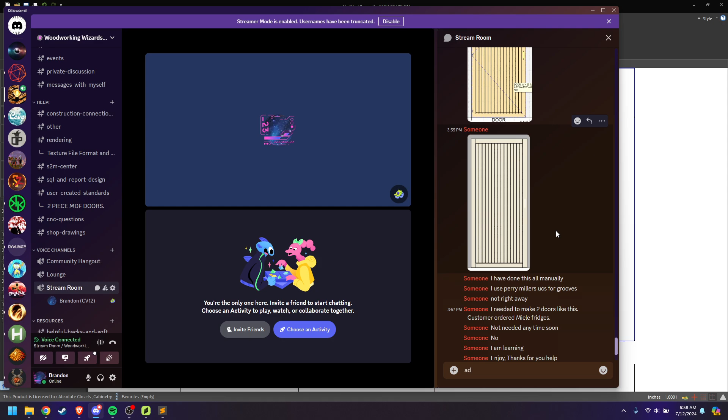This person is using Perry Miller's UCS for grooves, which I don't have any issues with—I think it's great. But in this case, the user had to shape constrain their flat panel that was going into their shaker door, because their 3/8 router bit that does the rabbet on the back side of the door would leave a 3/8 radius in the corners. So they wanted to shape the flat panel insert on the corners to match the inside radius of their tool.

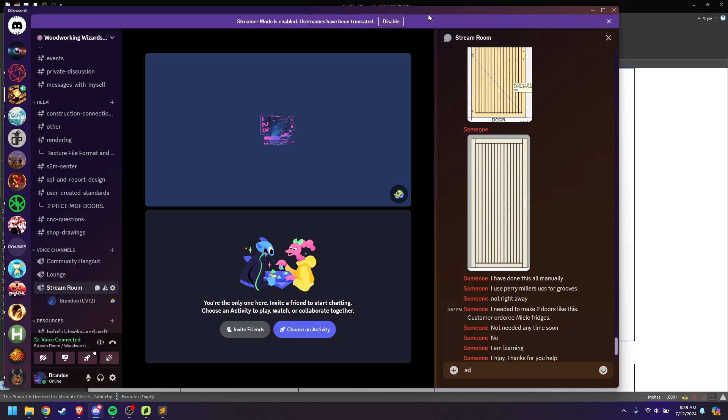So to do that, we had to do some shape constraining and then save it as a library part. Adding routes like this to a part that is being dimmed by a UCS is, well, basically—as much as I can remember, since I haven't done something like that in a while—you have to dim the routes and then owner them to the UCS-added part.

Otherwise it just doesn't work. When you try to dim operations to a part that was dimmed by a UCS, there are just some hoops to jump through. So not only was that kind of a bummer for them because they couldn't just use Perry's UCS, but they also were not familiar with writing loops.

After talking with Tristan a little bit about it yesterday, since he was kind of hanging out in the chat with us while we worked through it, I decided to try to stream for a little bit today and give a very simple introductory lesson on writing a loop.

Loops for me were something that were very, very difficult to learn, as anybody who spends time talking with me has probably heard me say, and might even be tired of hearing me say. I don't really know why it was so hard for me to grasp, but I know that it was. I think it's just a concept that is very abstract, and because of that abstract nature, it's just a challenge.

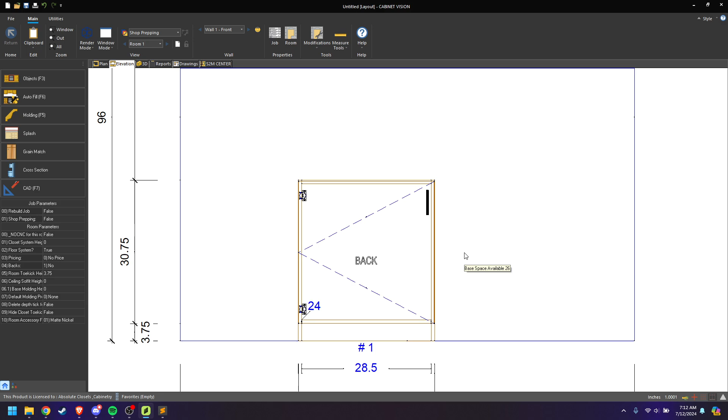It's still early and I'm drinking my coffee. Apologies. All right, so...

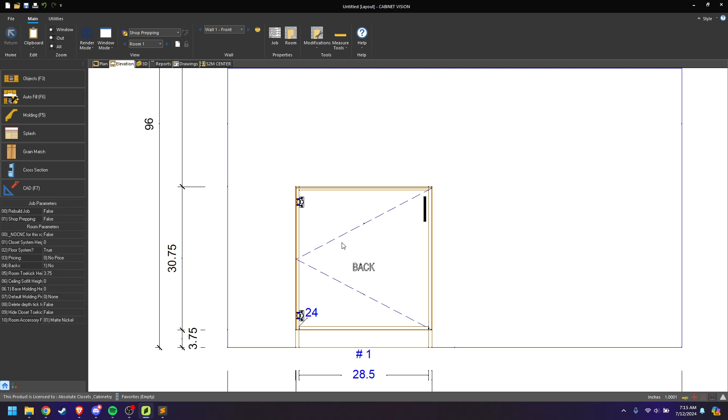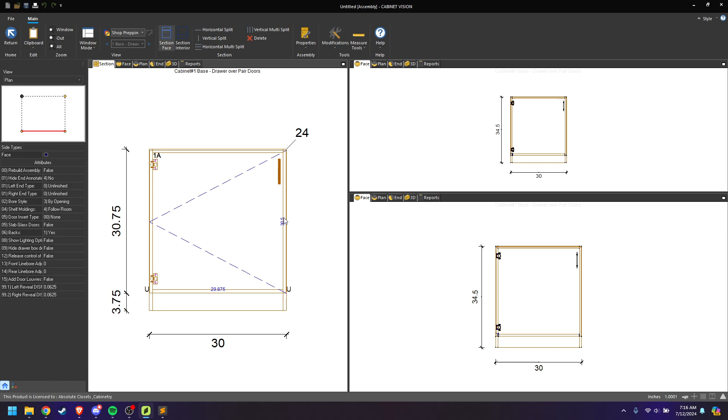You need to add a door that has a flat panel. So I'm actually just going to change this to make it easy, because I don't really want to find a door that doesn't have any UCS working on it. All right, we've got this little 1x1 dado appearing on my door - so we know I've at least typed the right word for it. The lovely thing about the doors I've noticed is you don't really see the dado when you're in the part editor, and I'm not sure... I almost wonder.

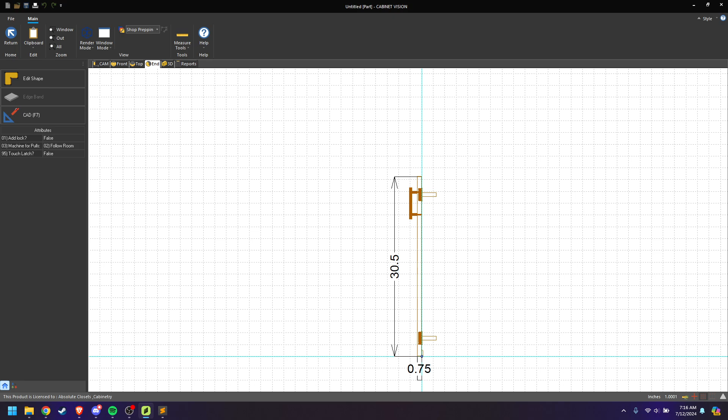So one of the kind of fun things, if you know the answer to this, great. But basically, while looking at the actual part editor, I feel like you don't get to see the routes that you add through UCS, which can be a little bit confusing and frustrating at times. But whatever. You can check it at the S2M Center, and you can measure it right on the assembly.

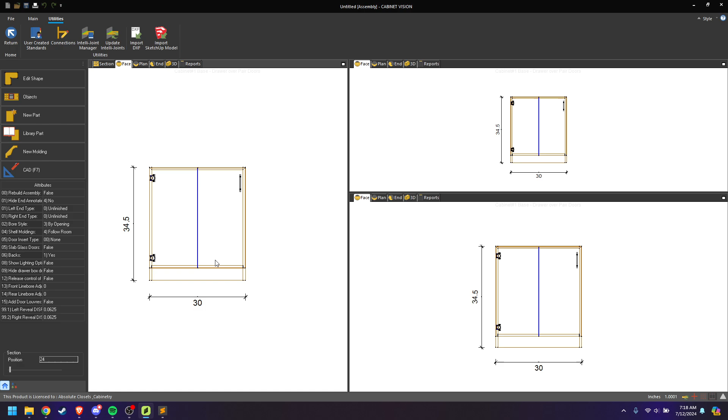So now we've got this sort of... well, let me make it look a little bit more like what we were saying. Just a thin little groove, right? Jeez. All right, so just a thin little groove on the door, right? And what they were wondering about.

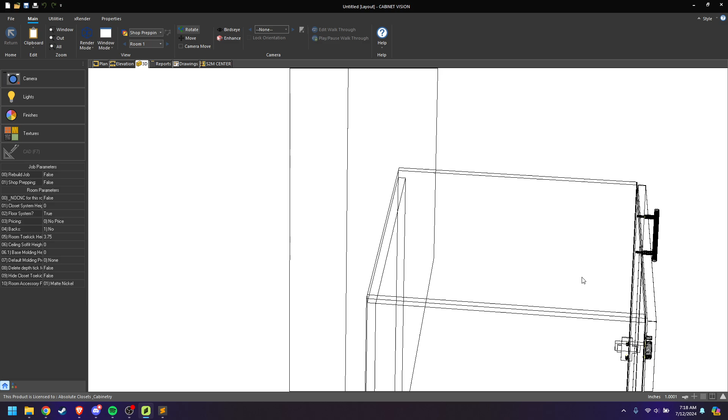Oh, it's on the back of the door, of course. Man, I am just firing on all cylinders today with this. That route is like on the... oh, I didn't add a face working plane, of course. There we go. All right, so there's just a groove in the middle of this door, 3/8 of an inch deep, right?

And so if you wanted to make this groove appear as many times as you need it across this door, that's one of the places that you're going to want to use a loop. Anytime you have an unknown, like an unknown size that you want repeated operations occurring on, obviously not a line bore, because line bore you can just use repeat, but yeah, anyway, I'm rambling. So

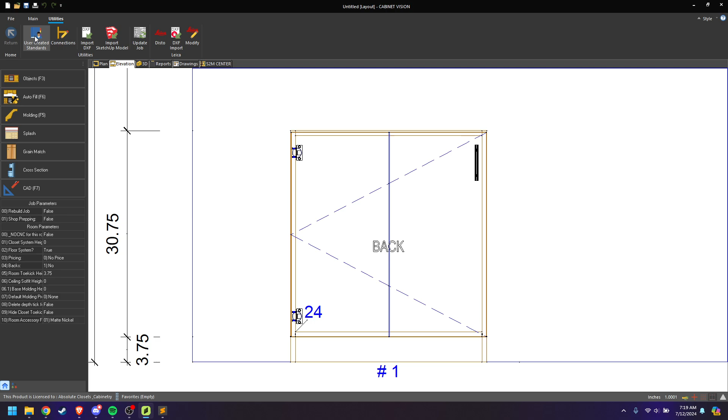just to kind of give an example of a really basic way to do this, if you only had one door that you were going to do this on and you never needed to do this again, so there's no sense in writing a UCS for it necessarily, that would look something kind of like this. So you got your first groove. All right, now got my second groove, my third groove.

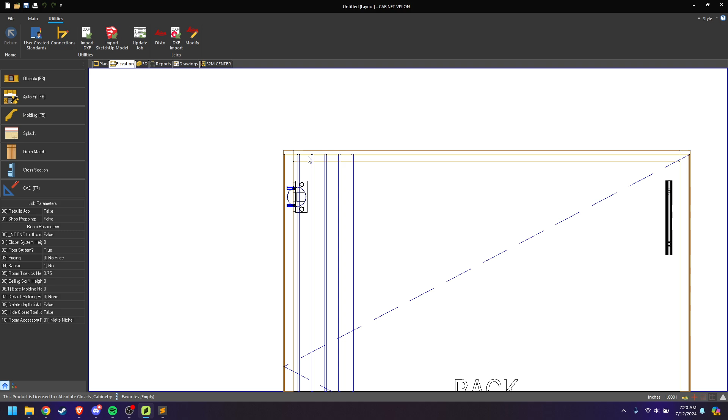Right. Already we're at like 68 lines of code. But right, we're starting to get grooves down this door. Cool, right? So for this one, you just copy paste that 14, 15, 20 times, whatever it is, and you've got a door that has all your grooves on it, which is great. You send it off for approval from whoever you're working with, and they're like, that's great. I love that. Except these are too close. Each one of these things is way too close right now. We need to have 2 inches of space between all of the grooves instead of 1 inch of space.

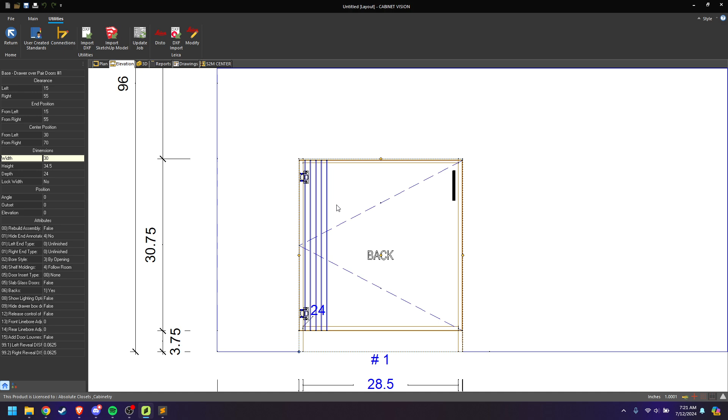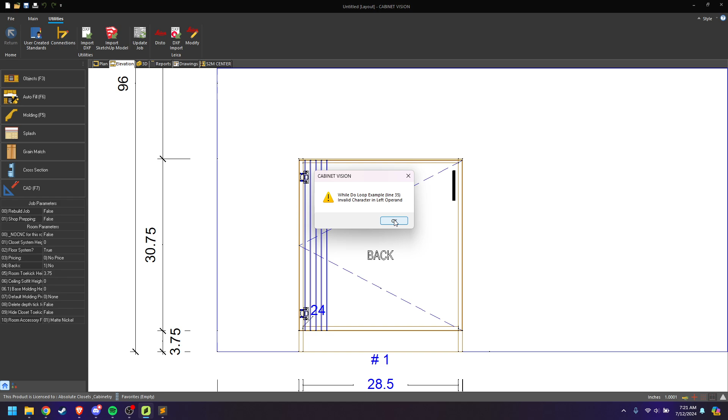And so then you kind of have to go back in here. Oh, sorry, I'm kind of thinking about doing it manually. Back in here, and now change all of your x's to multiples of 2. And then, of course, inevitably, right? Oh, come on. Finicky bastard.

All right, so then you send this off. You're like, great. All right, cool. Got it. Done deal. They're going to be satisfied with it. We got the job. And they come back to you and they say, I really thought I liked 2 inches, but I don't. Let's go back to 1. So, of course, now you're wasting your time doing the work again and again, right?

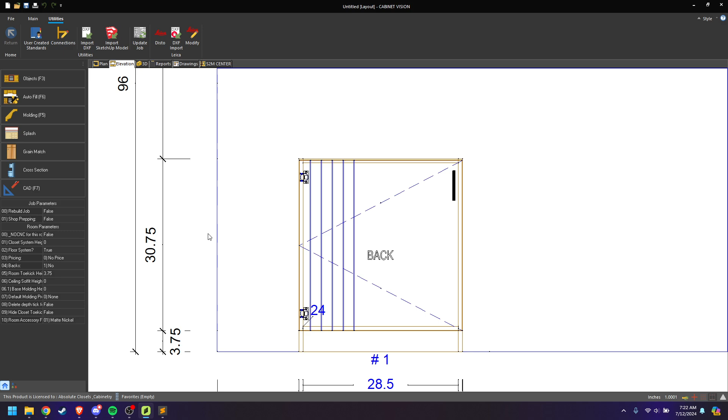So anyway, again, I might be beating a dead horse with this, but I'm trying to explain as best I can certain cases where using a loop will be beneficial to you and where it will save you time. And when you've got repeating conditions that need to be met, loop is very good for something like that. So how do we actually write this as a loop instead of just repeating that block of code over and over? Well, the first thing we would need to do,

and I'm going to say this because it's worth saying every time: whenever you're writing a UCS, you should always have a condition at the very top of your UCS that prevents your UCS from ruining everybody else's work. What I mean by that is have a filter of some sort that prevents what you're doing from affecting anybody else's currently open jobs. This is especially important if you're on a network because the changes you make to your user-created standards are more or less instant. If you're on standalone and you pass your databases around, not quite so important as long as you remember.

But I can tell you there have been a couple of times that I have forgotten to either put a filter in place or shut a test UCS off before I distribute our database to the team, and people have ended up with things on their computer wondering what the heck this is, right? So I'm at home and I'm not going to be distributing this to anybody, so I'm pretty safe to not have a test filter in here, but best practice, right?

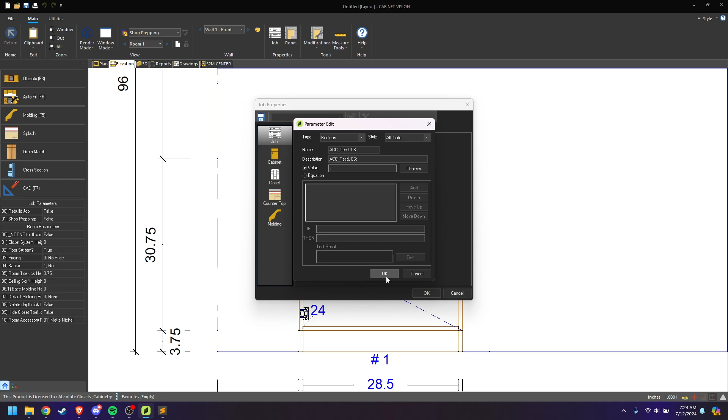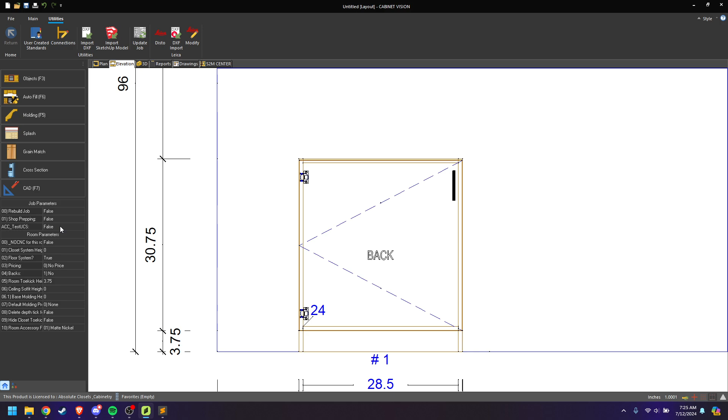All right, so got my test UCS filter in here. Even if I do give this out to the rest of the team, as long as they don't add this to their job, they're safe, right? And as you can see, it doesn't even have to be true or false because I wrote it as if it's null. So how about this? Now I can actually flip it on and off while I'm in the job, in case I wanted to see what things are like while it's on or off, right? Anyway,

All right, so hey, look at that, nice. Again, forgive the pauses. I'm just kind of chilling a little bit this morning, drinking my coffee.

All right, so to sort of use what ChatGPT had to say as a guide, we've already established that we're trying to repeat a block of code multiple times. We saw the manual application of it and how cumbersome that can be. So let's go through and actually build a loop. Before entering the loop, you typically initialize a counter or set up any necessary variables.

So the types of variables that we might want are going to be groove width, groove depth, groove spacing. If you happen to want to maybe use different shaped tools for different profiles, then you could put groove tool ID. I'm not going to do that, but just to give you guys an example, these are the variables you want to initialize before the loop.

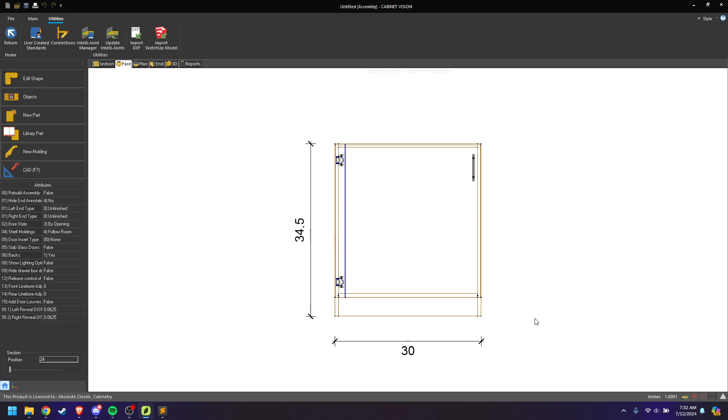But to keep it simple, we've got the values transferred, the parameter values that we've generated, and we've got them in here. Before I write any looping stuff, I just want to make sure that this is working, and it's definitely not. See, this is freaking jacked up.

Oh, because I'm a dumbass. Wow. So forgive me for that one. That was a disaster. Only got the X right. Every other one I just kind of derped on.

All right, so where are my attributes at? So this is another frustrating-ish thing about doors because they kind of work like assemblies. You have to put your attributes on the door part. And I will just exit after we do all of that.

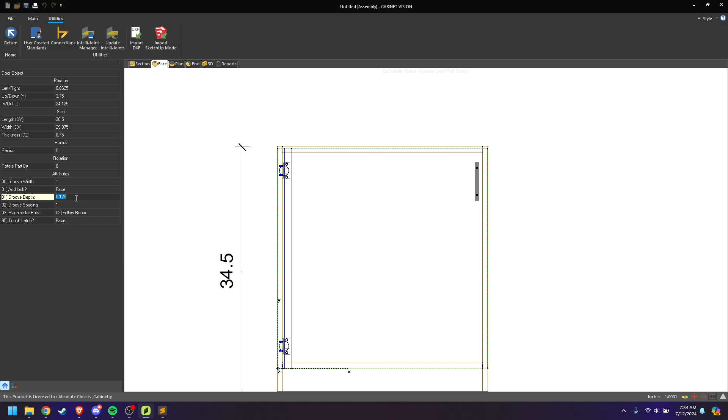Anyway, so now if we click on the door, we've got these groove values. Can change the width. It's responding. The depth is responding, and the placement is responding. So just a good idea to test your stuff before you get too far with it, honestly. In general, whenever you're writing a program or coding or modifying, take small bites, and never mind the fact that this is obviously a problem going through the hinges. That's not really what we're trying to work on.

So, all right, now we're ready to actually get into writing the loop, right? We know we've got this block of code set up in such a way that the dado does get applied. It looks right. It's responding to the values that we've entered. So how do we get this to go for as many times as we need? You have to put it in the context of whatever it is that you're working with.

And so step 2 would be condition, right? There's a condition that controls how long the loop continues to run. This condition is evaluated before each iteration or each time the loop starts again. So what is the condition that we're trying to create here? Well, basically, the condition would be while, rather than trying to say it that way, in layman's terms, right?

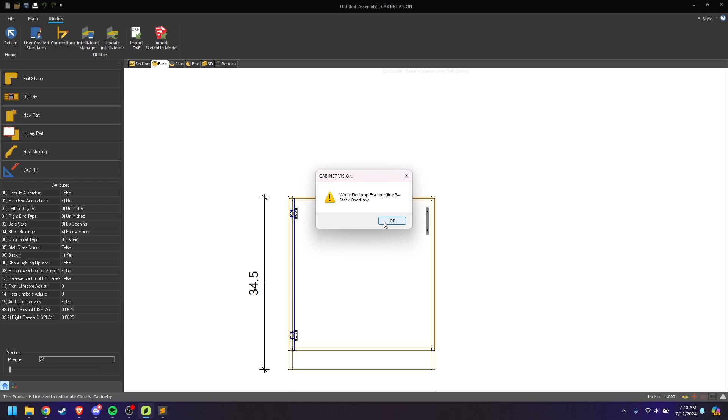Right? Stack Overflow. That means that your loop went on forever and ever, until you reached the maximum number of loops that Cabinet Vision supports, at which point it overflowed. So that message will help you.

Stack overflow usually means, well, I can't say usually, I don't know, I'm so new to programming. In the context of Cabinet Vision, that message containing stack overflow means that your loop was infinite. So you know that something is wrong with your condition, or you're not doing the right things with your counter.

But the way that you solve that is within your while do loop section here, after you've done what you want to do over and over, after you've written the code block to add the dado, that's when you want to add +1 or 2 or whatever it is to your counter.

Now, if you are not explicitly defining I every single time you change it to be an integer, you'll have problems if you switch between imperial and metric. So yeah, define it as integer every time. Or even not switching. If you're metric and you don't define it, you're going to have problems. So just make sure you explicitly define this as an integer every time, and you should be okay.

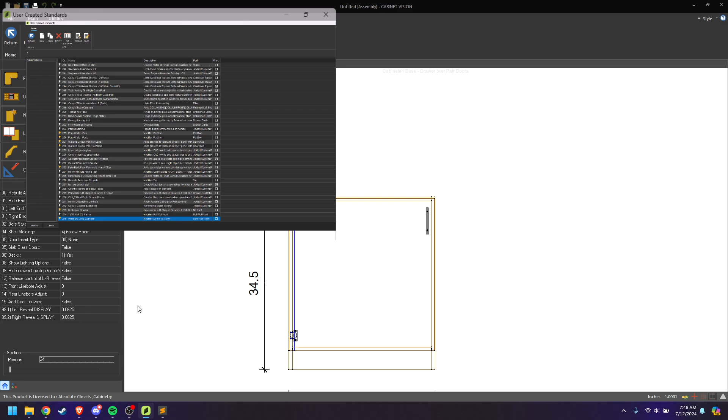And let's find out. Doesn't look like I've written everything correctly. And that's going to be because I didn't actually do anything with I anywhere in here. So it looks like nothing happened, but what we will find is if we look in the object tree, this door is going to have a bunch of routes, and they're all going to be in the same exact location. Freaking stupid thing. Sorry, I'm used to the object tree, not here.

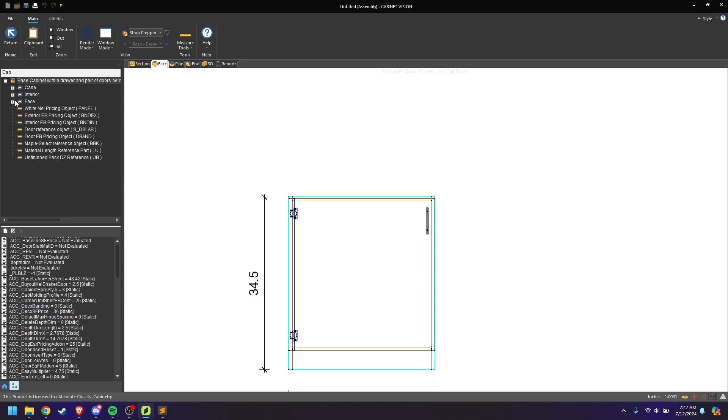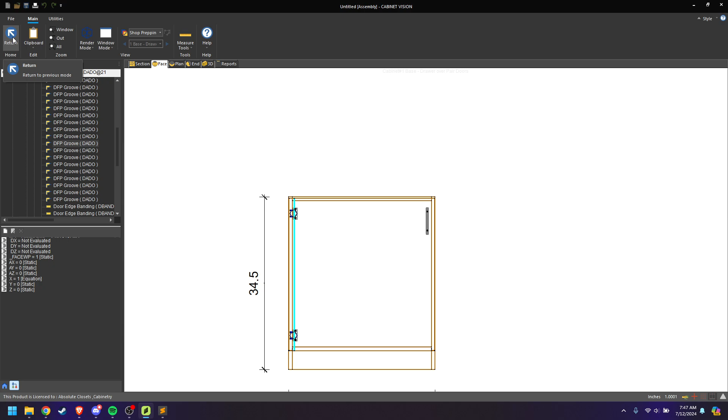And there we go. Look at all of those dados we got. And every single one of them is in exactly the same location. Right, all the way down. Dado 29. Oh, there's a lot. It might even be more than I was expecting, but well, no, my door's 29. Cabinet's 30 wide, so that's right.

So what we need to do here is we actually need to make sure we're using I. And so this is another part of the loops that was a little bit hard for me to understand. The reason was because it took me a long time to start to grasp the difference between defining a value using equals or defining a value using colon equals. If you don't know the difference between those two things, this is going to be fairly challenging for you.

But I will simply say that when you say dado.dx equals ACC groove width, you're saying that once the UCS has completed everything it needs to do, and you're down at the very end of the UCS, ACC groove width is what DX will be at that point in time. And so in this case, if we looped through this thing 29 times, at the very end of it, it's still just putting all of the grooves right here.

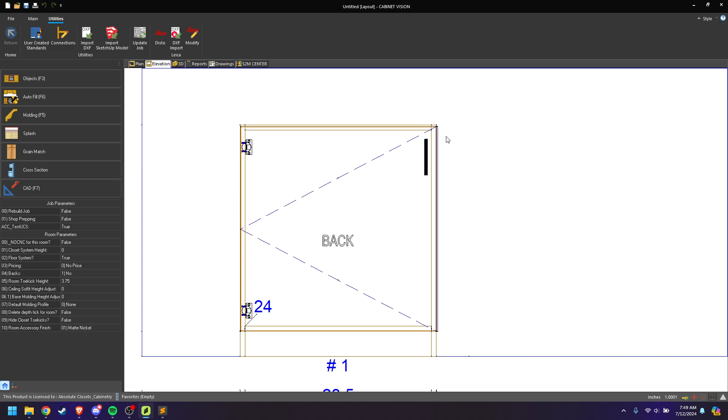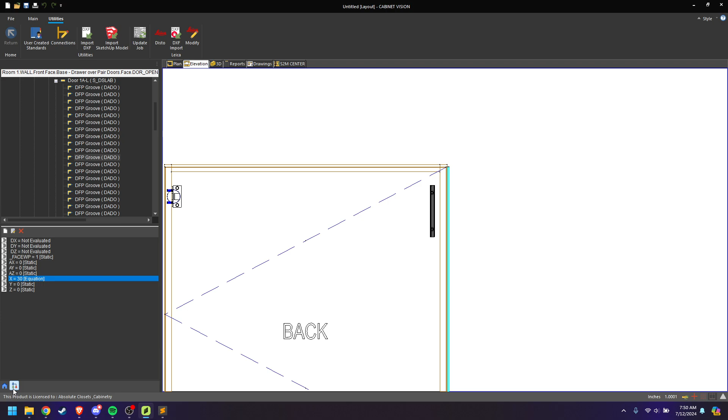So that means that the counter went all the way to the end, and the calculation was done based on I being equal to like 29 for every single groove that was placed. And again, I'll show you that because I think it helps. Right, 30. X is 30 on all of these things. And if you look at the equation, it's ACC groove spacing times I. So what's I? I is 30. So of course it's going to be that. So you get around that in your loop by using colon equals.

And so what colon equals does is, rather than allowing this to be calculated as an equation that waits to resolve until the end of the UCS, every time you loop, you are defining the dado.x value at that exact moment. So the first loop, it's going to define dado.x as ACC groove spacing times 1. The second iteration, it will define it as ACC groove spacing times 2. And because we're using colon equals, it's defining it right now as the loop occurs.

This is a concept that was very difficult for me to grasp. So if you're having a hard time with it, reach out on Discord. We can talk through some other examples, especially if you've got something in particular that you're trying to work with. But basically, we're using colon equals here on groove spacing. So you might wonder, why are we not doing that for all of these other fields as well?

And the reason is we actually are not changing the groove width. We don't ever want the groove width or the groove depth to be anything other than what it is. In other words, they all need to be the same width and the same depth, regardless of which iteration of the loop we are in. So loop 1, the width is 0.125. Loop 2, the width is 0.125. Loop 3, the width is 0.125. We're not trying to change anything, so there's no real reason to force it to occur right now during the loop.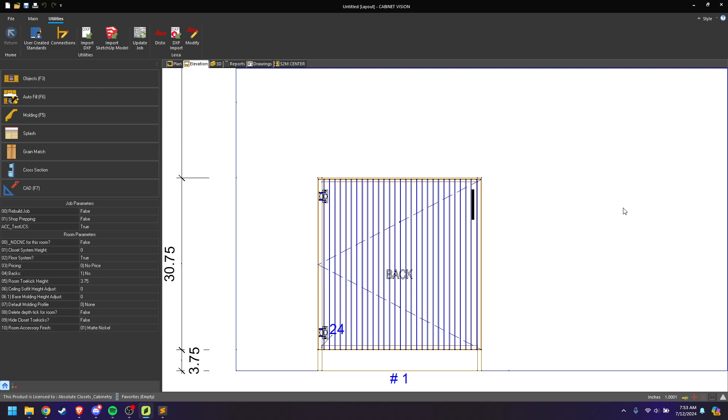The main thing is that we want to see grooves all the way down the door, which we're seeing now. And if we examine the object tree, these all just say door slab, which means I definitely did not get them naming the way I wanted. But again, I kind of expected that. We do have different dados at least, which is great.

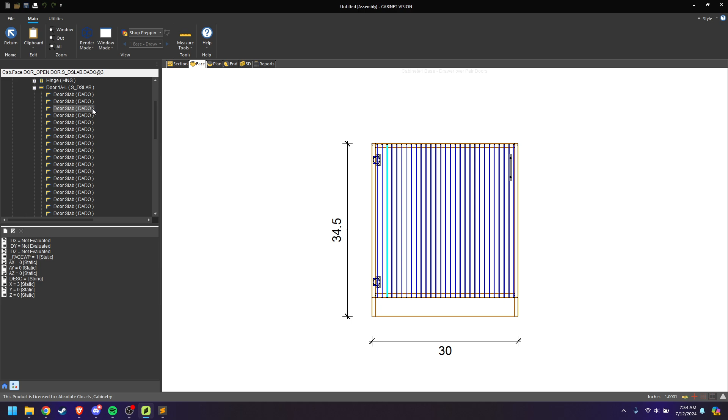So this might be a weird situation where you don't actually need to... yeah, so looping and defining string values, see this as an exception where you don't want to define it as an equation. Just to add to the confusion, right?

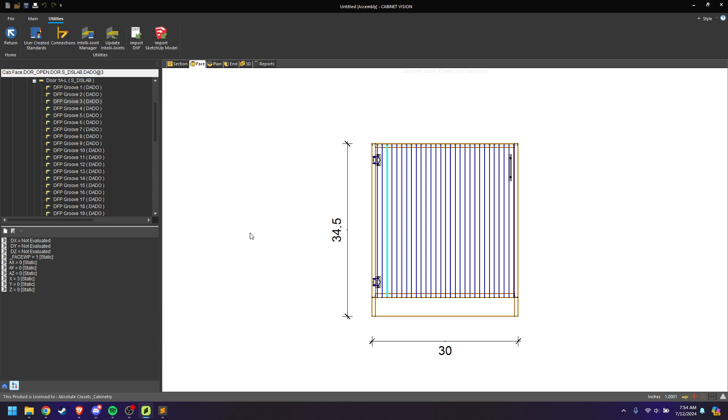But as you can see here, every single one of these is named now, and so we can see pretty easily where every single one of them goes.

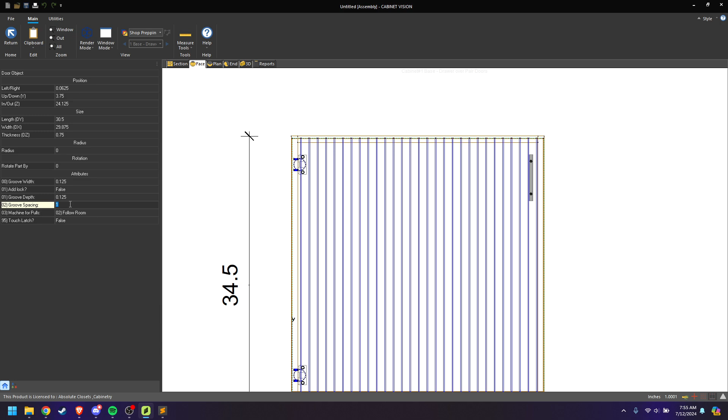Now we can test and see what about the other stuff we did, right? Do the grooves actually change? If I increase the spacing, do they just run off the edge of the door? Because that would be how this would work if you had a static 29 different grooves coded. If you change the size of your door or the spacing, those grooves would just run off the edge. So if we go to 4-inch spacing, look at that.

We have fewer grooves now, and we didn't really even have to change a whole lot. The reason this kind of works, and the reason this is such a powerful concept to understand, is you can throw a block of code logic at a variable condition that you can never really know the final result of until you get there, and it will handle it every time. The only thing this doesn't do is start the spacing and stop the spacing equally, because we didn't build anything for that.

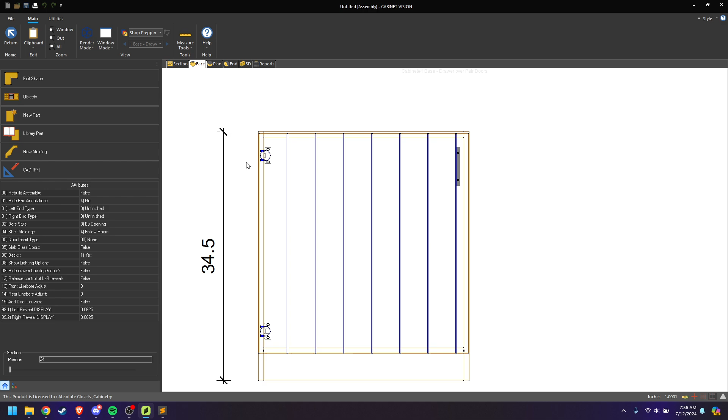But yeah, we could add just a little more logic to this to adjust the start of this. If I can get that done in about 5 minutes, I'll do it. Otherwise, if we hit 8 a.m. and I'm still in here, I'm probably just going to end the stream. But I'll try to run through it real quick. So how would we really even start to do that? Well, you would need to really...

So basically the math would just be the width of the door divided by the spacing, and then you would take the remainder of that, and figure the difference between the remainder and the first position, and that would be where your first dado would start.

And if you are defining your start location as a little bit different from your counter, you kind of need to write that, I think at least, a little bit differently. I feel like when I've done something like that in the past, I actually start the first iteration of the loop outside of the loop and then go based on that. But let's see what we can do.

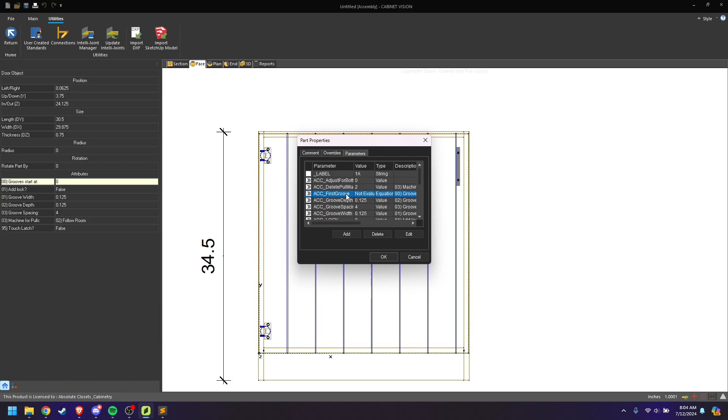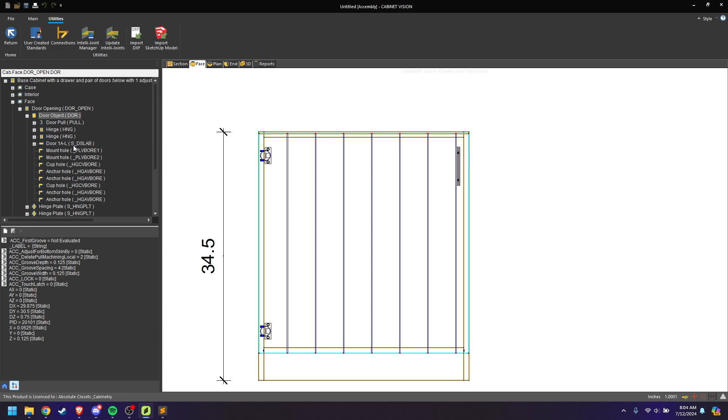Oh, freaking object tree, crap. Okay, so because the D slab is the child of the door...

There. That's kind of an interesting number, the 4688. My math is clearly very wrong on this right now.

Come on, brain, work through this. Okay, so that's what I'm getting. So 7 times... It's amazing how the simplest little equations can stump me from time to time.

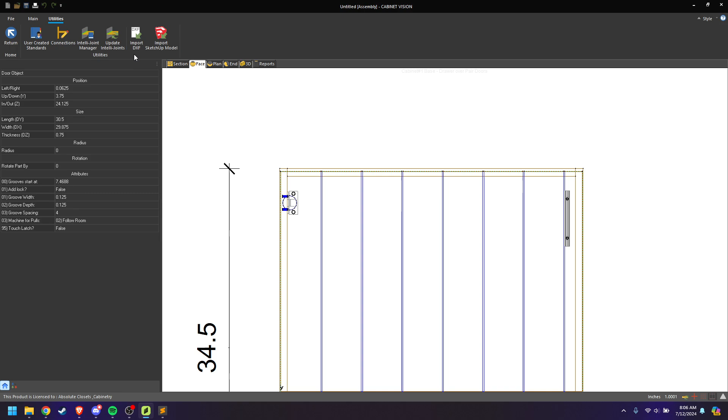So I might be overdoing this equation a little bit, but...

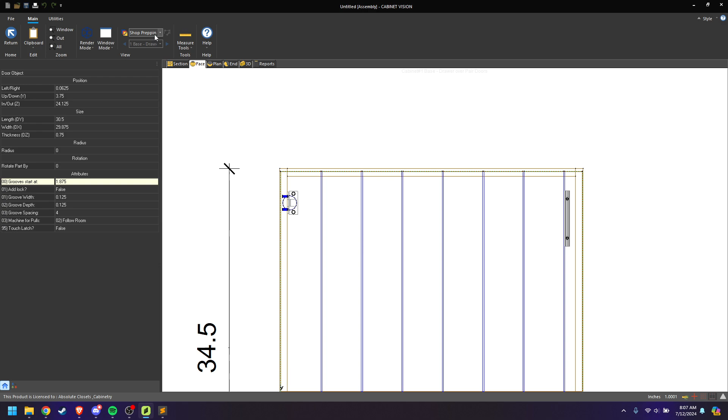So groove starting at 1.875 is actually the remaining distance there. So I'm not considering the width of the last dado. So this should give us 1.75, which should be the very end amount.

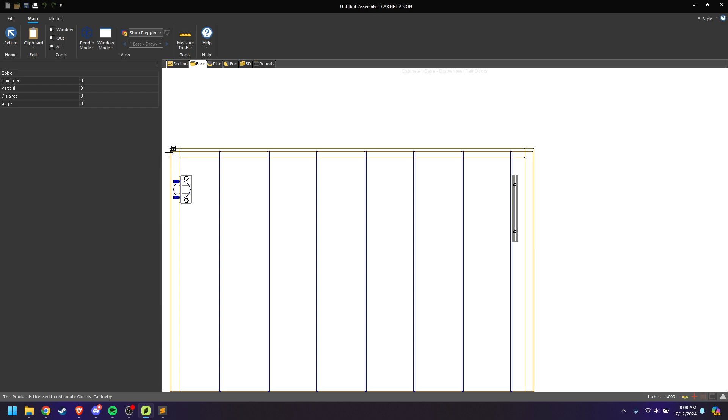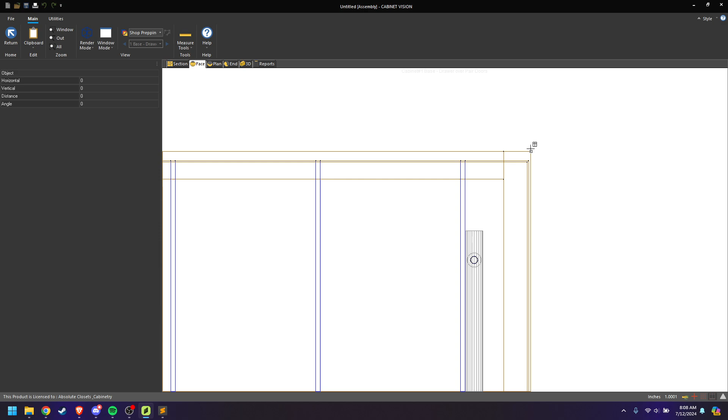Okay, so all of this plus groove spacing. So the number we should be seeing here, if I've done this correctly, will be 5.75 divided by 2, 2.875 if the math is right. Beautiful.

All right, so now that we've got this first groove value defined with this stupid equation, what you can do is, within the loop, you can say if... I do it here.

So we're saying if i is equal to 1, which would mean if it's the first loop, the first iteration, then we want to set the groove spacing to actually be first groove. Otherwise, set it to groove spacing times i. And first groove should be the value we calculated here, and I'll briefly go through this equation after we demonstrate that this is right.

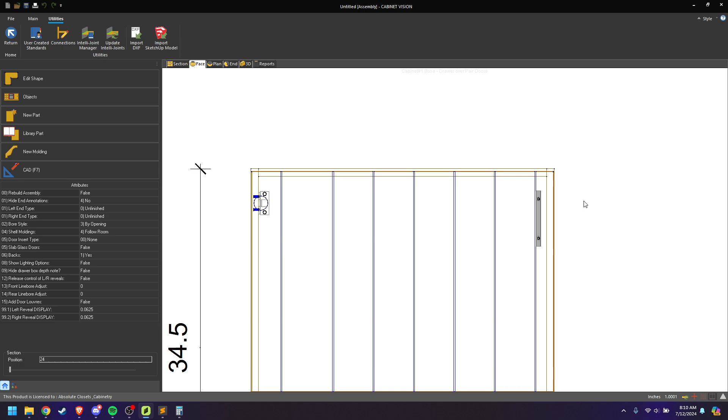Of course, it only targeted the first one. So then here, what we need to do is plus... minus... Yeah, still not quite, not really what I was wanting. What am I doing wrong here? Come on.

So this would be a good example of where you wouldn't want to initialize with 0, I think. But that means my first dado is going to start...

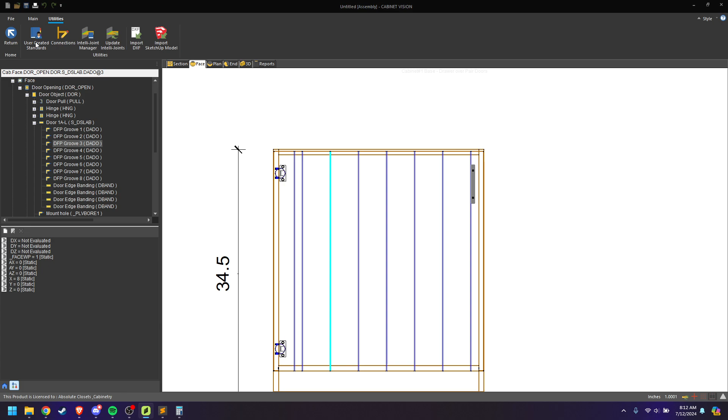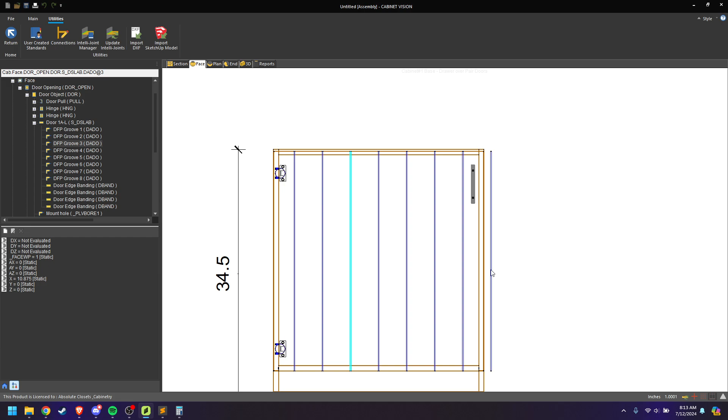All right, so in this case, I would need to, because I'm adjusting the start point, do a little more logic to control where that last one is going. But anyway, 2.875, 2.875, they're spaced pretty much perfectly.

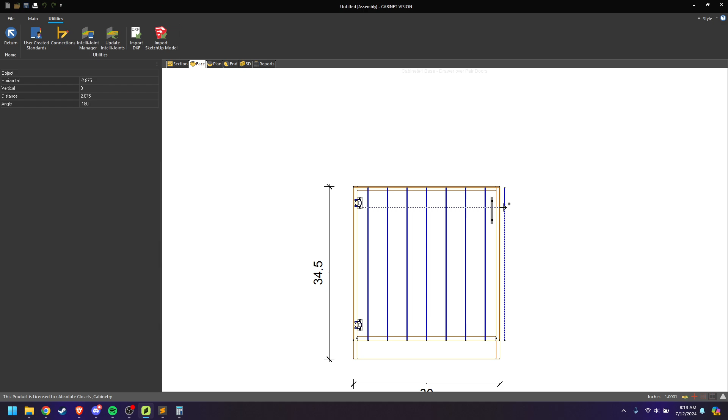So to handle this last one going off the door, you would pretty much just need to add a little more logic to make sure you don't accidentally do that. And it might even be something that could be worked with in the initial while here. But anyway, hopefully this has been, despite being a little rambly, as they tend to be, and despite a few obvious issues working through it, hopefully this will be a good example for you if you happen to be trying to learn about loops in general.